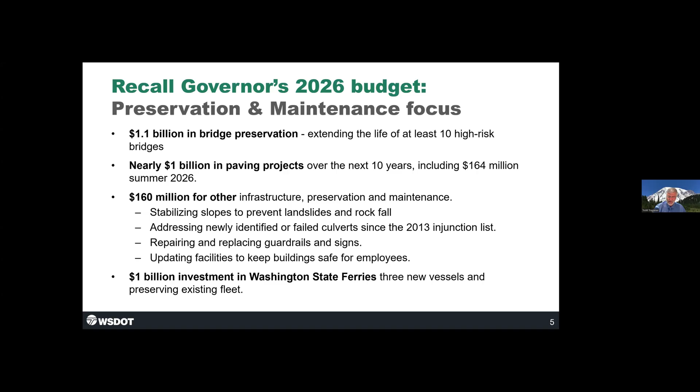As we walk through the '25 season, the governor, in his first full year in office, very much learned and came up to speed quickly on the need for preservation and maintenance, and actually incorporated that into his budget request going into the legislative session, asking for over $3 billion. So we didn't get the 3 billion, we got 1.5. That sets a very good and interesting stage.

Some more specific details—Charles had this laid out in a slightly different format. Here is that 1.5 billion: 1.3 of it lays out in our traditional preservation, and 200 million goes into maintenance operations. More importantly, right now, as we look at the 25-27 session, it's 300 million into preservation and 40 million into maintenance. Hang on to those numbers.

I think everyone has been intently watching the space program with the successful splashdown that happened. As I was thinking about that 1.5 billion, I think Charles articulated that it wasn't nearly enough. Another way to think about that is Apollo 13—if you remember, when they needed the oxygen scrubbed and their mission was a failure, they just wanted to keep the astronauts alive.

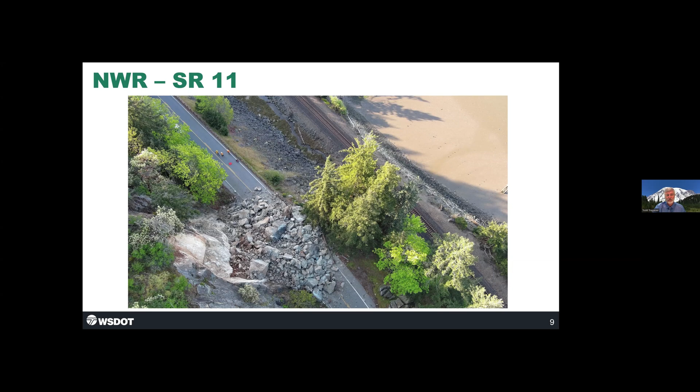Northwest region: an unstable slope and a landslide. This should start to look scarily familiar to you. Northwest region: a steel structure, not painted, member failing, detours for traffic impacts—could have been prevented if it was painted. A theme you all know, but it's worth reiterating.

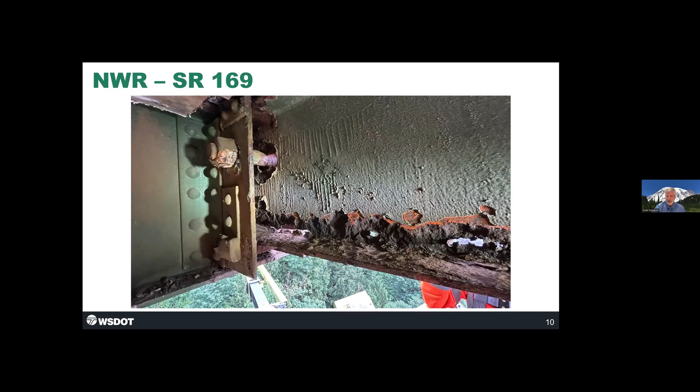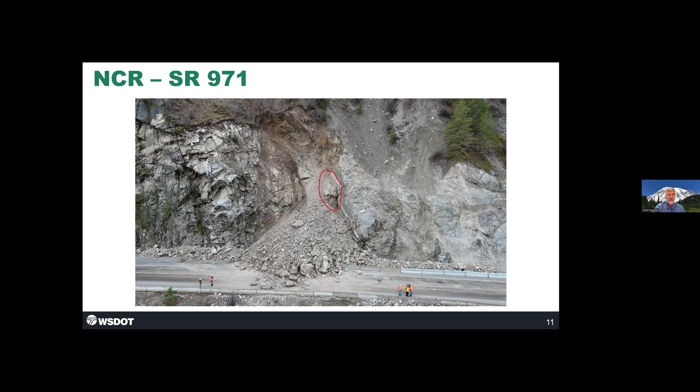North Central region: another unstable slope, failed onto the roadway. Starting to sense a theme here on unstable slopes. North Central region: bridge rail up north—look at that, that didn't deteriorate in a couple years. That's 20 years of deterioration that could not be programmed because the prioritization decisions that needed to be made had to be done with an emergency contract.

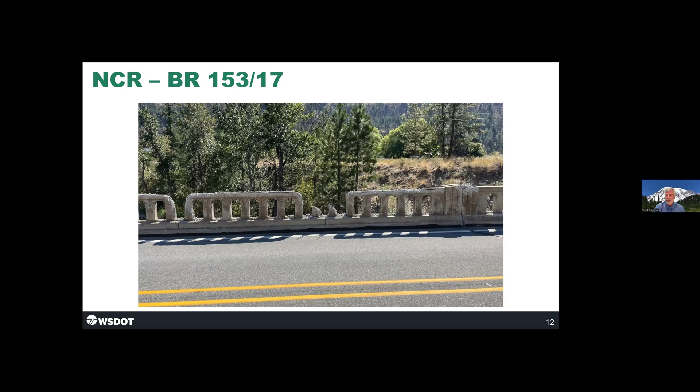All these slides you're seeing are done now with emergency work. Carbon River has become the touchstone piece—it's like now Carbon River isn't just a project, it's an acronym for failed preservation. Is that going to be another Carbon River?

So Carbon River, again, I think you all know it well, but very low volume road, no freight movement. Almost every prioritization method that you can think of would say, if you've got to cut funding, you would cut it here. But that cut of funding, which was done, resulted in this structure ultimately not even being able to carry pedestrian traffic across it.

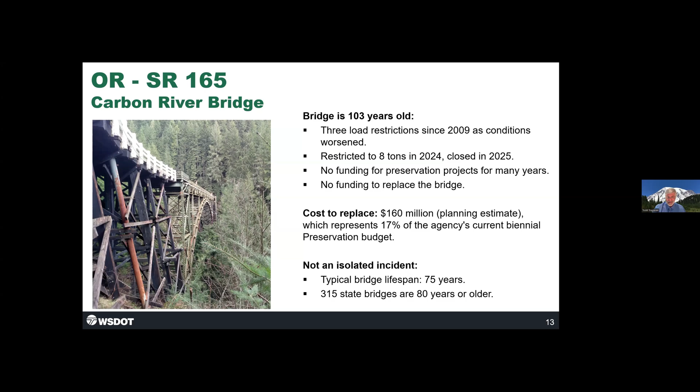Now, if it is chosen to replace it, its napkin estimate is $160 million. So Carbon River really did get everyone's attention on this need for preservation and maintenance. And as bad as it is for SR 165 and Carbon River and the citizens around it, it is good for getting a solid understanding of where we're at.

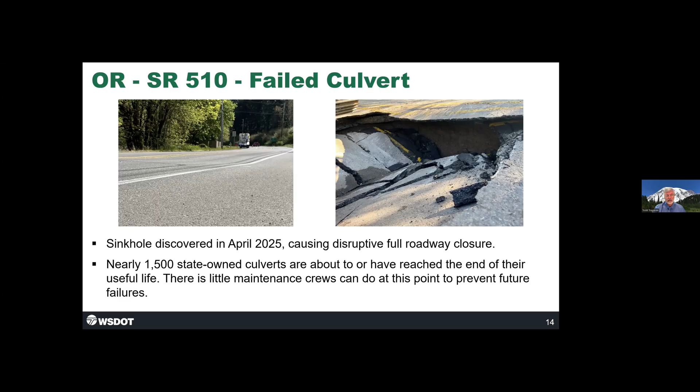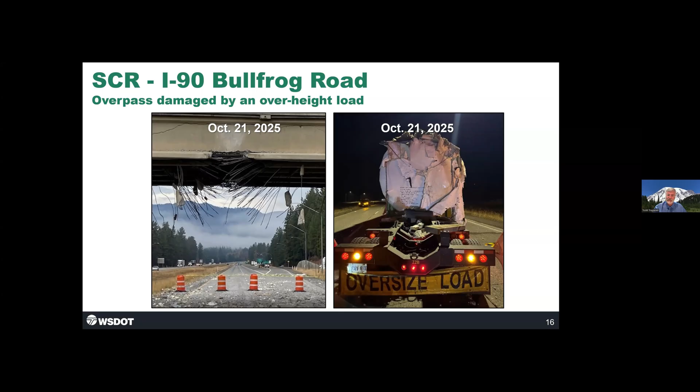And then to hit all 6 regions here, just a utility vehicle out of control hits a bridge rail, and we got another road closed and more emergency work.

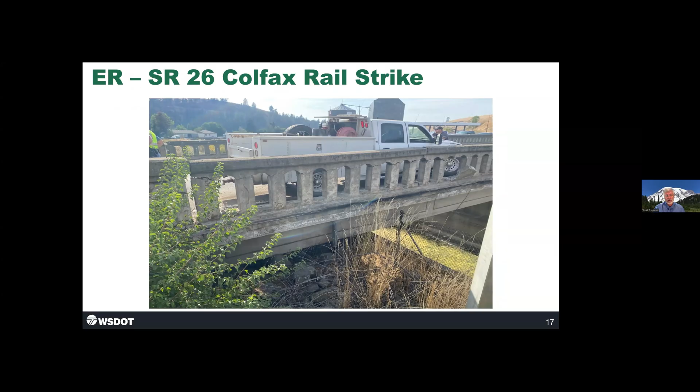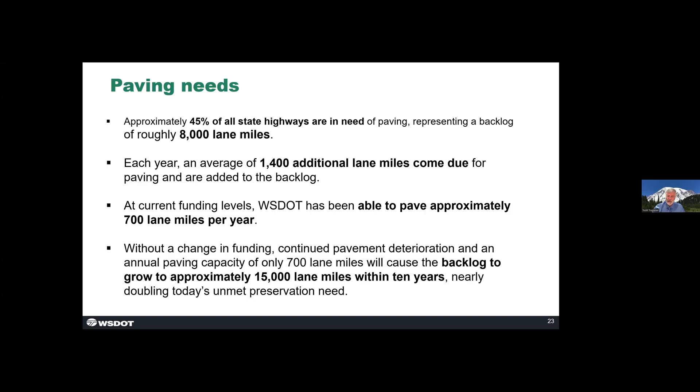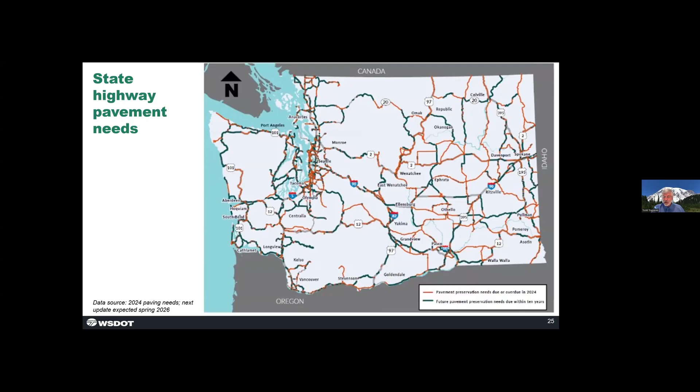Do you want to see it in a graphic picture? Sorry that it's blurry, but just know orange and green are bad. That means it's in those categories. Light gray means you're in good shape. How much light gray do you see on that map?

Not much. Okay, we're going to jump now to bridges. It's the same story, a lot of data on this slide. I know I'm moving fast, so just go where the line has the underline on it.

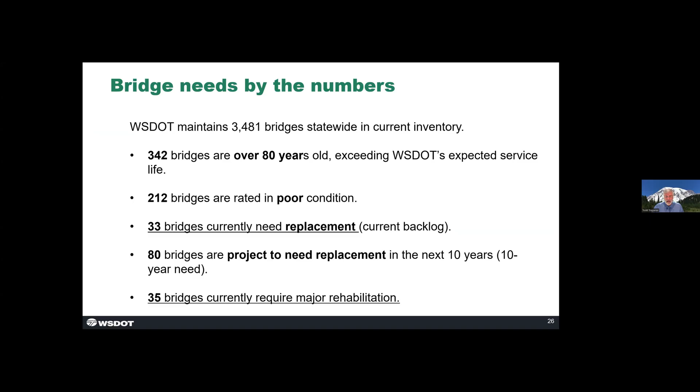33 bridges currently need replacement, 35 requiring major rehabilitation. Why? Here's a chart of the age of our bridges. We have 342 bridges that are over 80 years old. That is beyond where you expect a bridge to function.

Look what those who will follow us in these chairs, because a lot of us have gray hair now, look what they are facing in front of them. The amount of structures that were built that are reaching those ages that are going to need attention. And remember, right now we need 2.5 billion. What is going to happen when those 1,172 structures start to need work? I'm going to touch on that, because some of them actually are failing prematurely.

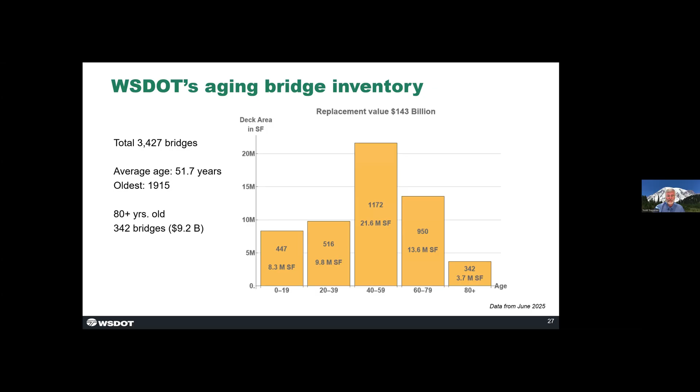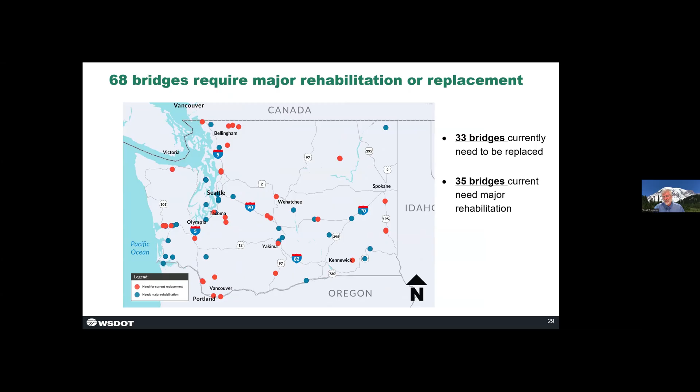If you like graphics, here it shows those 68 bridges. They're not just in one location, they're across the entire state. The bridges that need to be replaced, need to be rehabbed, are across the entire state. If you wanted to go out 10 years, across the entire state, the picture does not get any better.

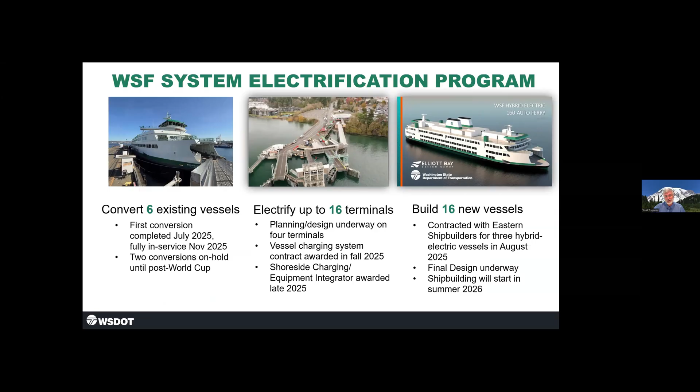Ferries, since it's one of the critical funding needs, is not my area of expertise. Charles touched on it a little bit. I'm just going to hit it lightly on what's been passed through. This is what is believed is needed to try and keep this system going, and I'm just going to break it down simply in what they tell me. Charles again touched on this one.

This is a graph that just shows you the boats are too old. They need to be replaced. They're not being replaced in the right timeline, which means that they're not reliable. They take more money to take care of. And the number of boats that we have is insufficient for the need. That's the number one problem.

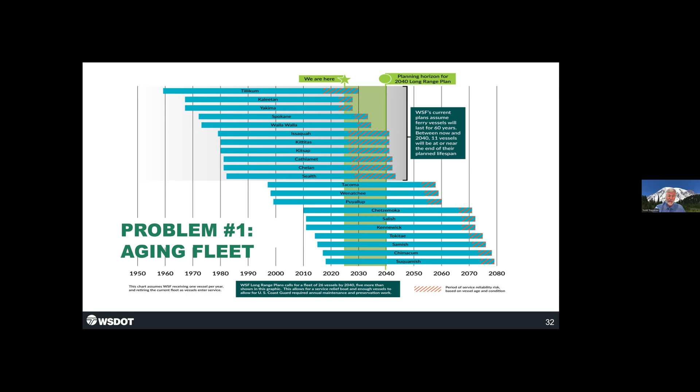The number two problem is this. This is a very difficult chart to read, but basically what it's telling you is we're being expected by the legislature to get out of the greenhouse gas emission creation, and you can't do that with clean diesel. Clean diesel reduces particulates dramatically, but it does not reduce greenhouse gases. The only way you get out of greenhouse gases, all this mess that's shown you there, is electrification of not only your boats, but your terminals.

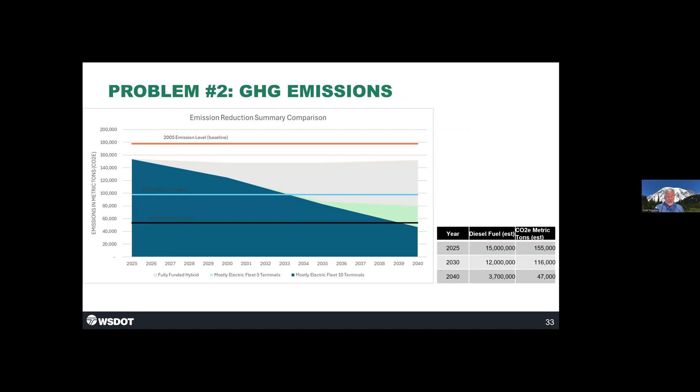Okay, jumping to the next critical funding need, maintenance operations. I've just got a couple points I want to make here. This is just a slide to show you the draw on those funds is getting more and more. I could have a whole presentation on all the aspects, but the chart on the left shows you all these assets we're building with that mountain chart.

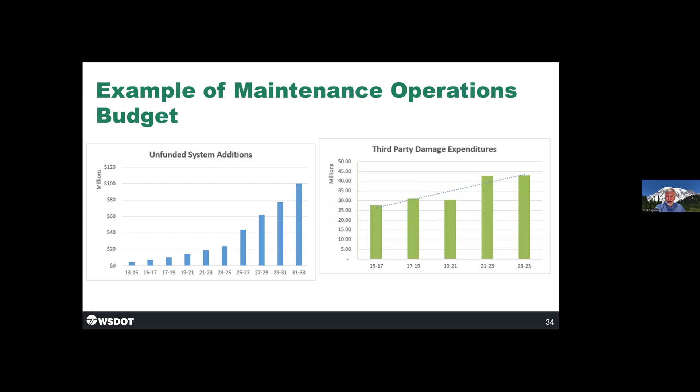They need to be operated and maintained. That money is not being given with the projects—that is the cost of those. The chart on the right just shows you one thing we do, how the cost of it is going up over time. I'm going to slow down just a second because I really want you to think about this.

Part of maintenance operations—I think we all understand maintaining and operating the highway, but we've hit a critical understanding that our facilities, where our people are operating out of, are not where they need to be. The facilities that take care of our equipment, that house our equipment, that allow us to have equipment, the facilities that allow us to have the resources to utilize that equipment, they're all too old.

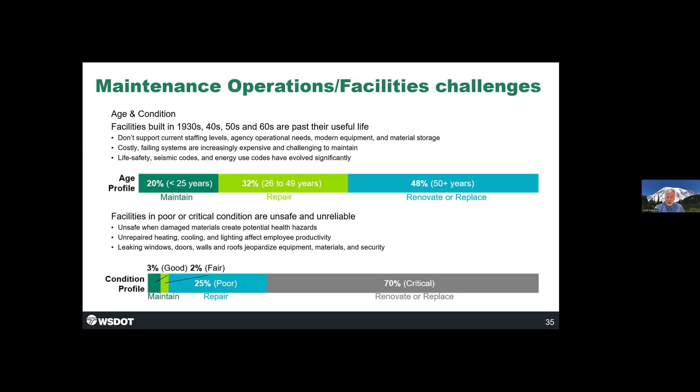Safety is always one of our critical funding needs. There's so many ways we could talk about safety, I was wondering how I was going to present this. I grabbed some verbiage on a proviso. There were some provisos that came out of this legislative session. This one is about getting the legislature to understand more when they invest in preservation, when preservation is done where there's vulnerable road users, can we kill two birds with one stone? That's kind of a current focus on safety. Safety could use investments on all sorts of levels.

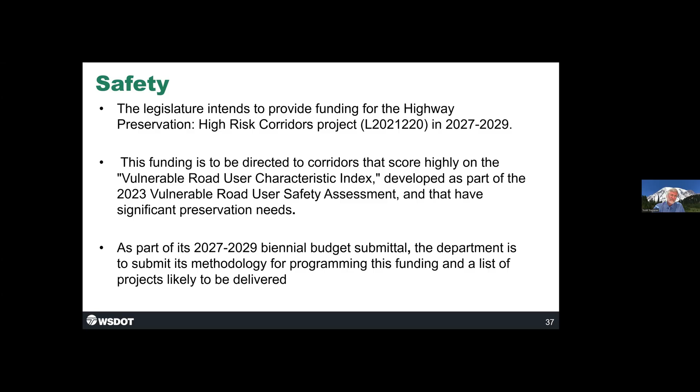Fish passage, the fifth one, we're just going to be continuing to comply with the court ruling. This has resulted in a lot of projects, I'll show you that in a minute. It also results in a large funding gap that still exists.

I think Charles alluded to this too with his level of service. Those were the 5 critical funding needs. This is not the 5 critical funding needs. Within a very short period of time I was able to quickly create this list, and it doesn't fit on the slide on purpose because I wanted to illustrate I could fill a slide in a snap of a finger with projects that you all know, some of them you endorse, some you try and make happen, that all are not currently funded in that $7 billion. That 1.5 billion is not helping them out. Any money that goes to any of these things will stand in the way of the 2.5 billion that is needed for preservation, state of good repair. So this is a challenge, and these projects, as you all know, are usually pursued by somebody.

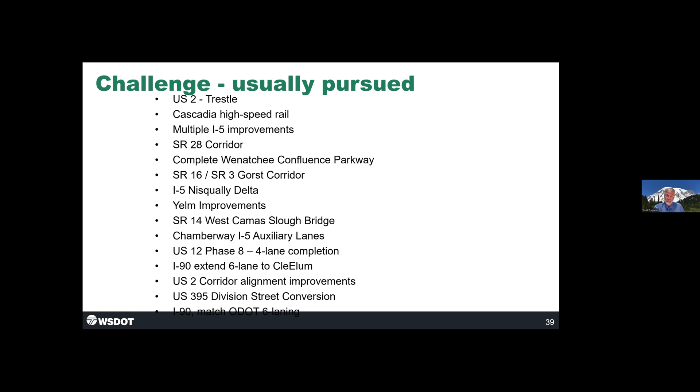Reflecting now on the impressions of the construction year. I just showed you a whole bunch of state resource needs, pavement, bridges, culverts, and all of this. I'm here representing the state, but I feel compelled to remind you, and you all know it because you usually have them here, the cities and the counties can tell you the exact same story with their system. They have the exact same type of problem, correlated to their size compared to ours.

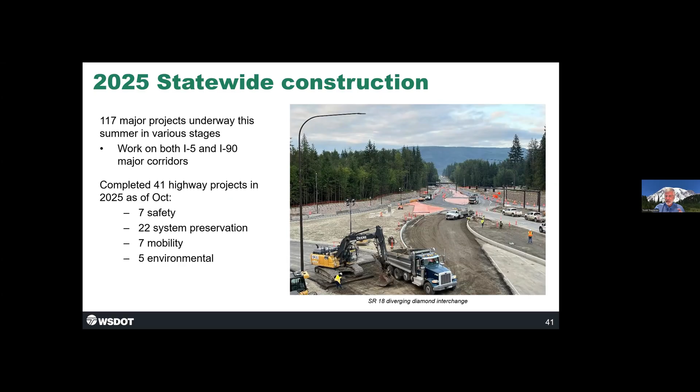Okay, so that was kind of depressing. Going back to the space theme though, we just had a successful splashdown with the integrity capsule. I want you all to understand and appreciate that 2025 was a successful splashdown for DOT. With all of your help, we don't do this alone, we had over 100 successful projects. I'm going to click through these really fast because of time, but they're important to see.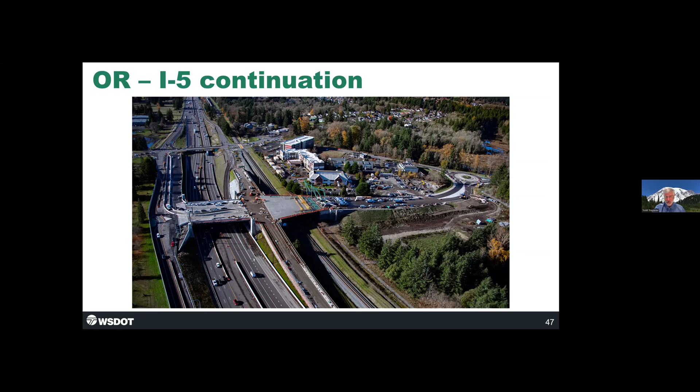Most of you on this call drive this a lot, you drive it probably paying attention so you don't hit the cars around you, and I know you have much appreciation for how much is happening here on the improvement of the I-5 corridor. 2025, another successful splashdown. However you feel about the bridge and fish barrier issues, we are pursuing that program with success after success after success.

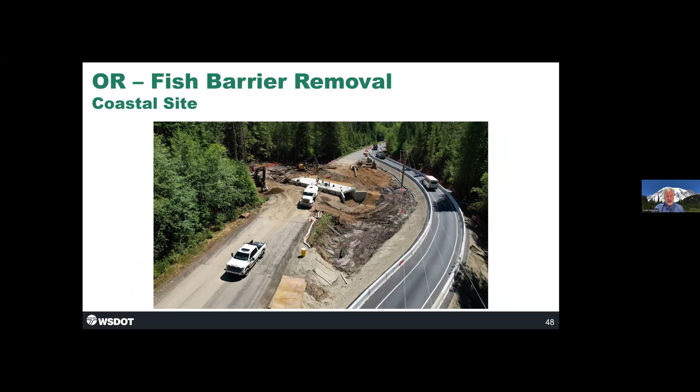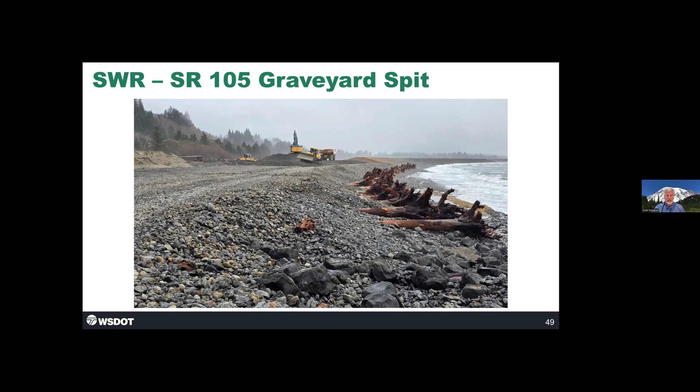This is a grade separation - we've talked about this for a long time, getting started in 2025. Snoqualmie Pass East is one of my pet projects because of my history in it. You are driving on miles of it that are a success, and know that in 2025, there's still more success in pursuing this grade separation being manufactured.

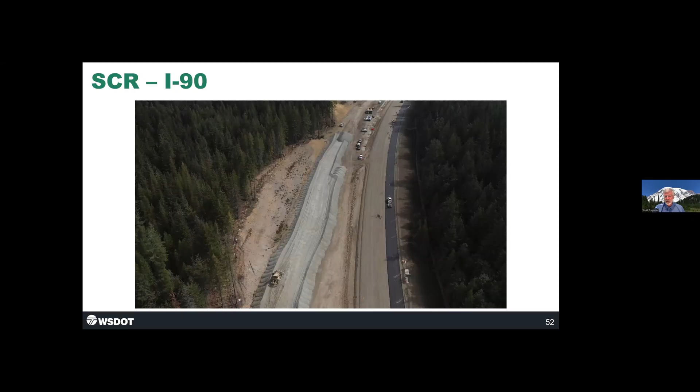This is more about animal separations, a huge success with splashdowns. Another one near to my heart is the North Spokane corridor. This is a picture of the crossing of the river - you can see off in the distance the corridor that's completed. Huge success, with 2 more contracts out in the contracting world right now, pushing this closer to I-90.

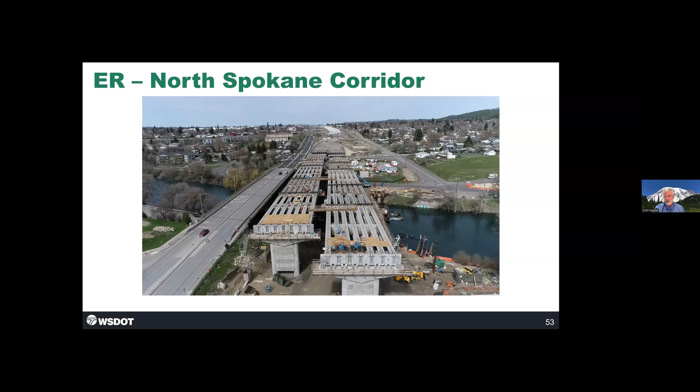2025, huge, huge success. So with all that I presented, there was also what was depressing and what we learned. If you look at 2025, we dealt with a host of emergency work, a program size that's the largest we've ever had, and these December storms.

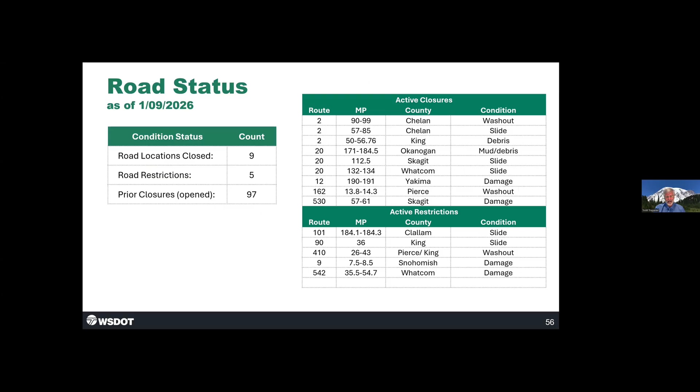I'm moving really fast, but I know you'd love to see some pictures. This atmospheric river that hit us in December, in a few days, caused more damage than I can ever recall in such a short amount of time. Over 100 roadways closed - this is a Northwest region hit hard.

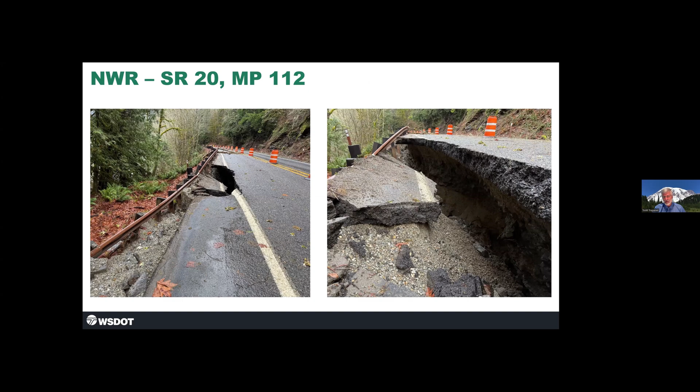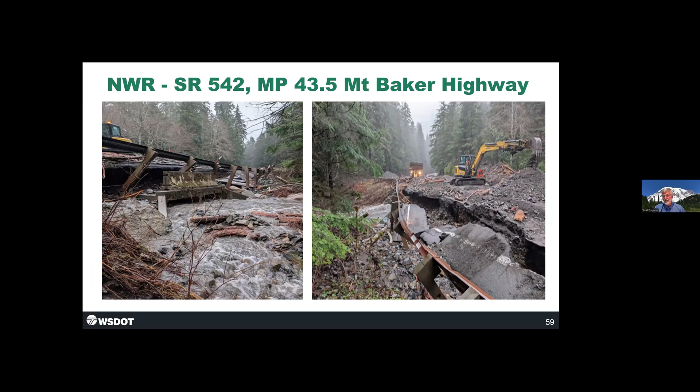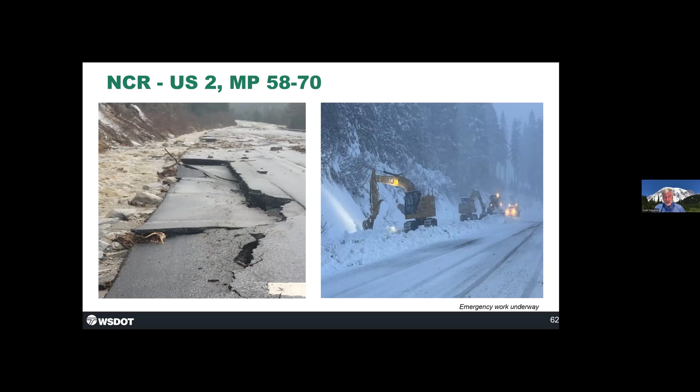This is North Central. I'll stop here for a second and take a breath because this is important. Look at that picture on the left - Tumwater Canyon was all but annihilated. There were like 7 areas close to what you see in that picture, roadway completely gone, all the supporting roadway prism gone, everything gone. And on the right is a picture of like 9 other locations that looked like that.

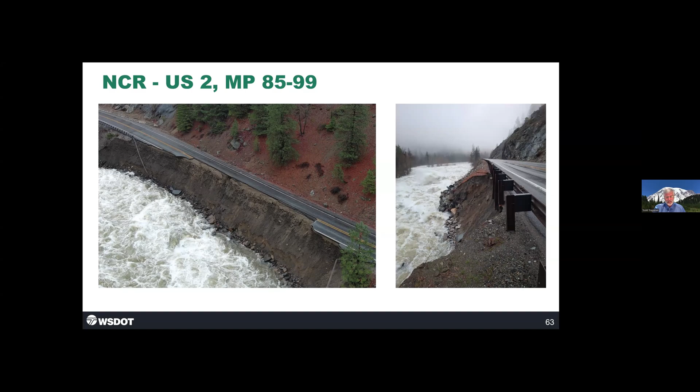Driving down the road, they didn't look bad, but if you looked over the edge, there was nothing holding up the guardrail any longer. So the amount of devastation on US 2 and Tumwater Canyon was all done by emergency contract - done quickly, efficiently, and effectively, but still costly and not planned in the program.

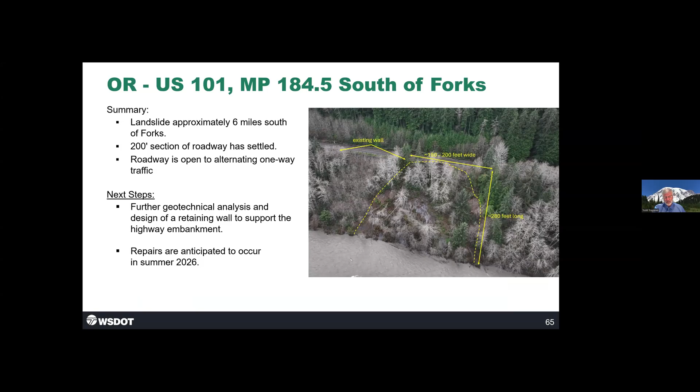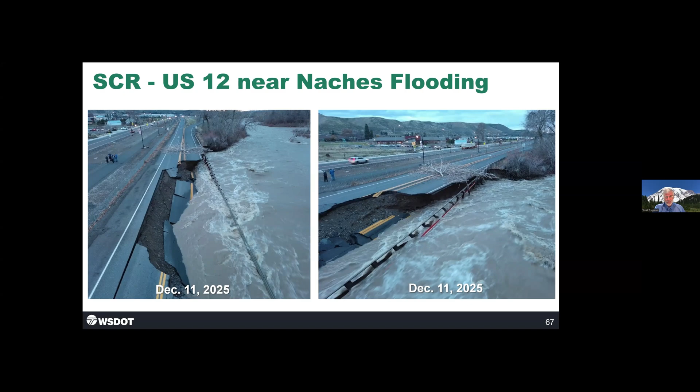South Central region, also in Naches, lost all of US 12 - all emergency work, over 20 emergency contracts, still putting together $50 million worth of work. So for us to pull all that off and keep our astronauts alive was pretty darn good.

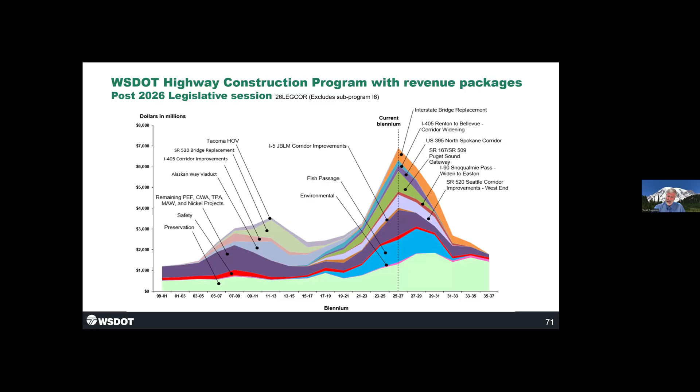So where do we sit now? We're continuing to deliver the largest program by dollar that we have ever undertaken. We've got this mammoth chart in front of us, and I'm here to tell you, just like that splashdown in the Artemis space program was a success, and they're planning for the next one, you're going to see the same success in '26. That's what DOT is here for, with the support of all of you.

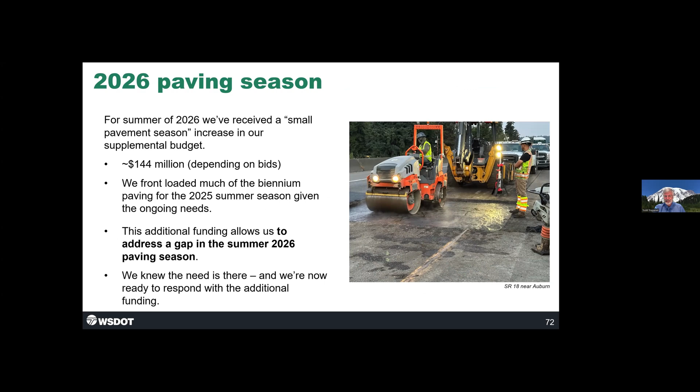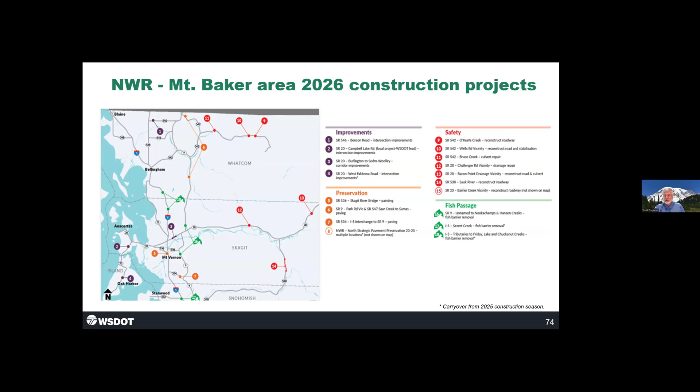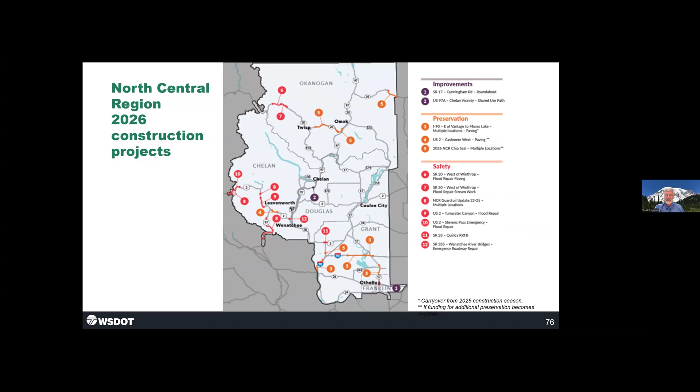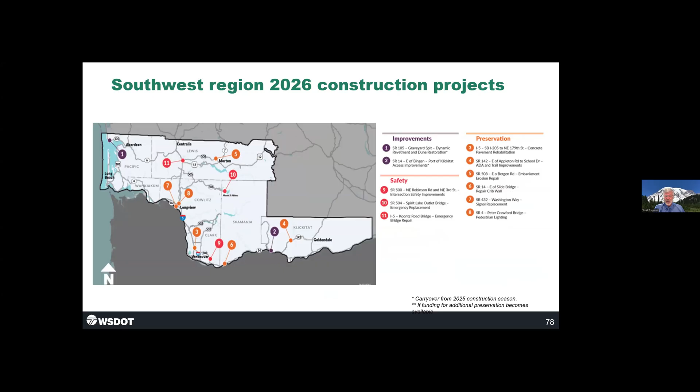South Central region, projects over the entire region. Eastern region, projects over the entire region.

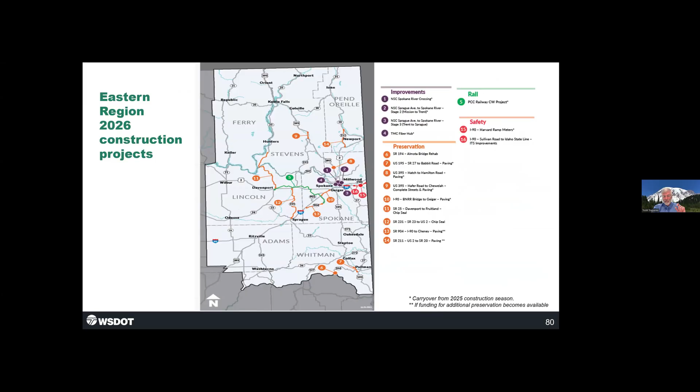The positive side of all of this is, man, are we going? We've got a space program going, and we're going to do another launch. We're going to get that base built. We've got everyone's attention because of what has already happened. They want to hear what's going on.

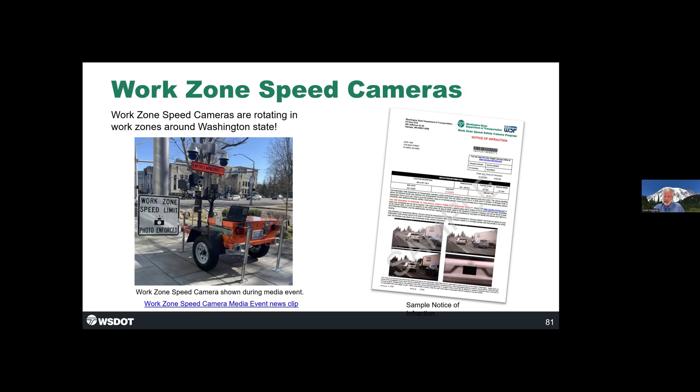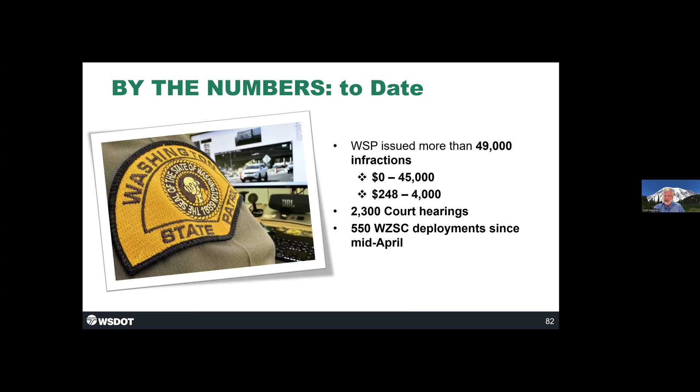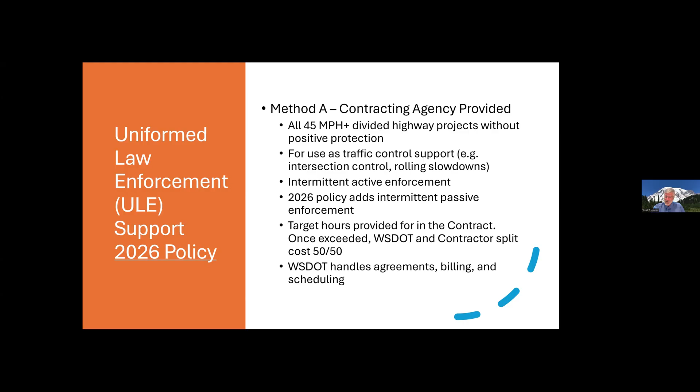Not only are we going to do this 26 season, I think you might have seen this come out, it happens to be like the 1-year anniversary of our work zone speed cameras. We will be having more work zone speed cameras this construction season. They're very successful, giving a lot of infractions, and they're starting to show data that they are dropping speeds. We will be using uniformed law enforcement officers within work zones to try and keep them safe. Safety, as we're doing this work, is highly important to us. Keeping our employees safe, our contracting industry employees safe, and the drivers on the roads safe is a priority, and we will be using these tools as well.

Okay, so we've got this space program. I keep using these funny things to kind of keep you excited to hear what I have to say. But guess what? In 26, we've already had the oxygen tank blow up.

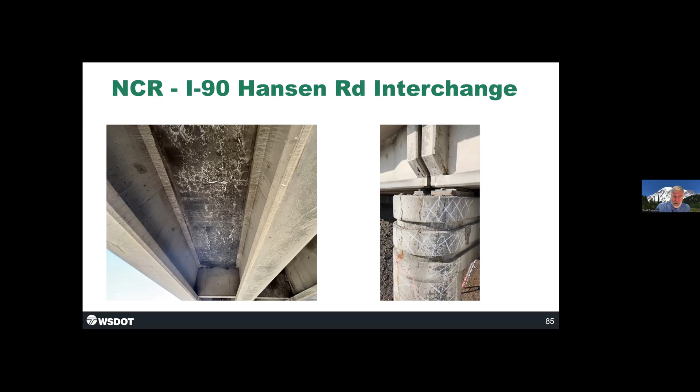I'm going to go back and forth. Do these pictures look familiar? Look similar? So the bridge we're using as a detour 5 miles away, the Hiawatha, is right behind it in its accelerated deterioration. We are watching this bridge closely. It is the detour bridge. The idea is it's probably going to last just long enough for us to replace Hansen, and then this bridge is going to go out of service.

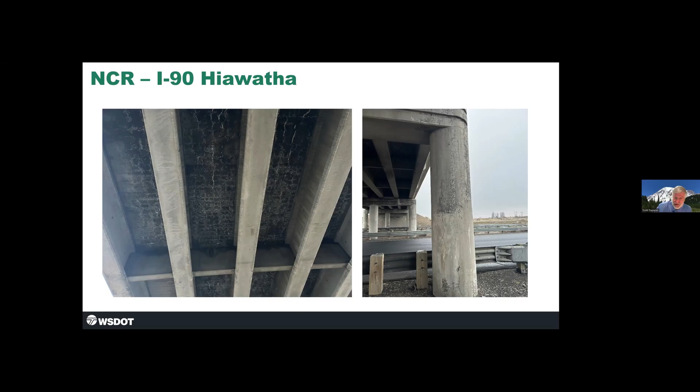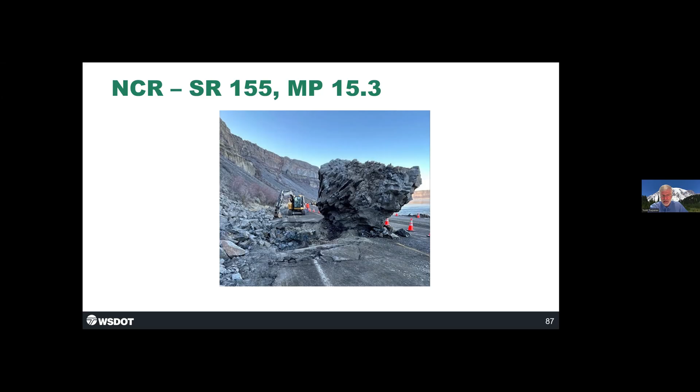If bridges aren't enough, these unstable slopes, I'm telling you, they're everywhere. There is something going on. I don't know if it is a combination of our lack of investment in taking care of unstable slopes over 20 years, aligned with different earth temperatures and climate, but we're having more unstable slope activity than we have ever had. Many of the features we put in place over the last 20 years, netting and so forth, are all used up because it has been catching rocks with no money to replace it, but we can use that 1.5 billion for some of that.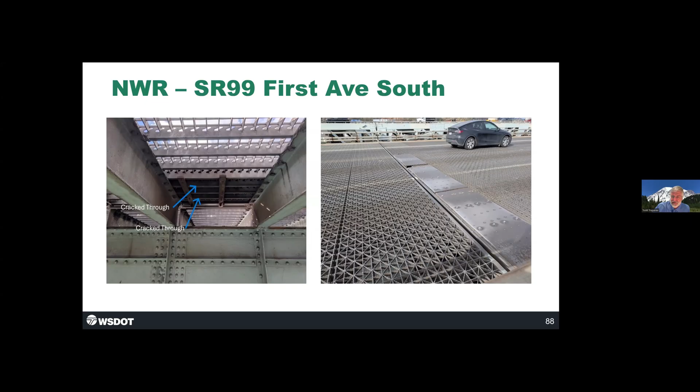This emerged out of nowhere. We count on this bridge to move traffic because of that deck replacement that we're doing, the Ship Canal Bridge. This is a grated deck. It started to fail, so a series of emergency contracts to try and keep this thing open that was not anticipated.

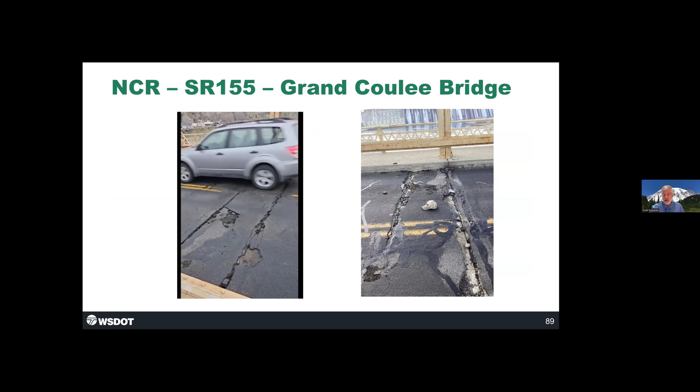This is a bridge up in Chris's region, North Central region, by Grand Coulee Dam. This is actually a video, it's on Facebook, you can go look at it. When a vehicle drives over this, it bounces up and down to the point that you should be concerned. It is safe to be open, but it does tell you this structure is in need of some work.

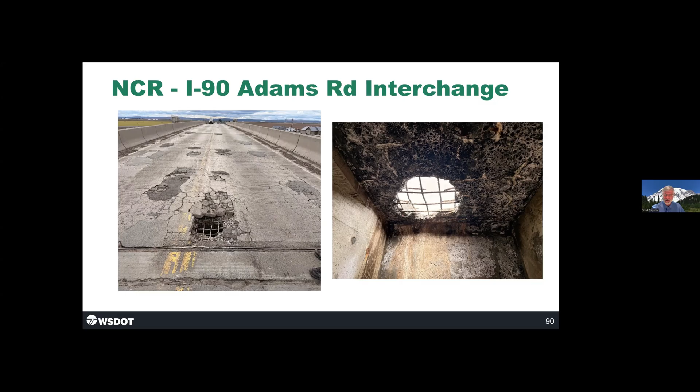Okay, I talked about Moses Lake area, the Hanson Bridge, the Hiawatha Bridge. You move a few more miles to the east, and we've closed Adams. So now we've got 3 bridges that are accelerated, 2 of them not usable and closed, 1 on its way, well before their lifespan, because they were not preserved correctly. Not because anything was done wrong, it's that when you make priority decisions but don't have enough money, there's something you don't get to do, and there's a consequence to it.

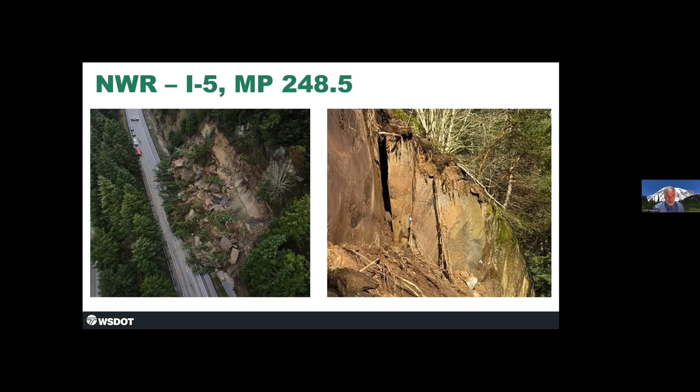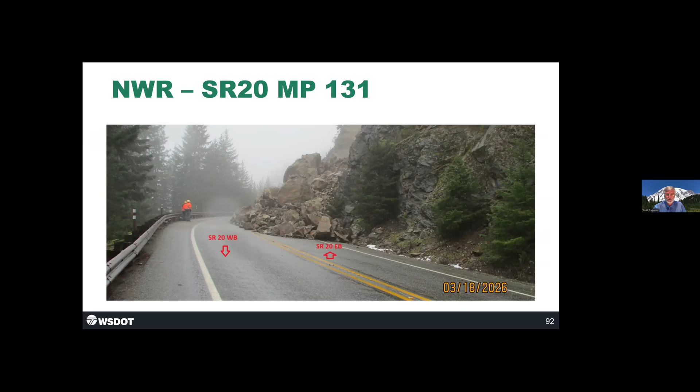Here's another washout. Doesn't look bad because the photograph doesn't do it justice. This needs attention on SR20. Out of the blue, another slope comes down.

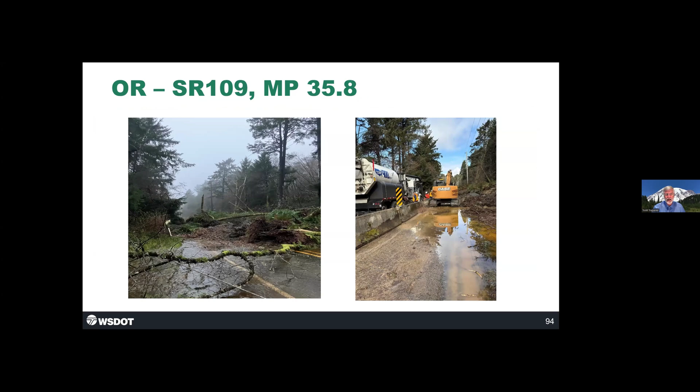This is in the Olympic region on 109. Culvert, another culvert failure. This is a combination of a resource being too old and, again, extreme weather events.

Another emergency contract. And emergency contracts, our issues are coming so fast, I can't even keep my presentation updated. So there's a few more that aren't even in here.

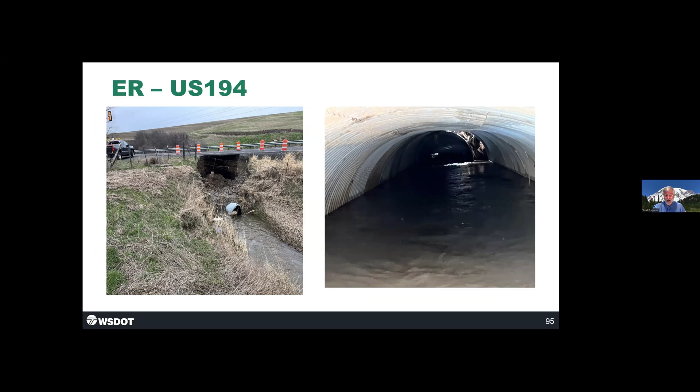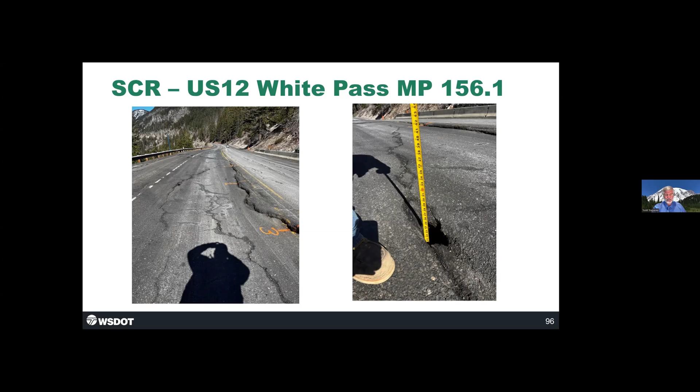The lip was getting so bad, it was catching cars. They go out there, they can drop a shovel handle in this hole, and another unstable issue that is taking place. We had to close a lane, evaluate it. This needs attention. So what is next on all of this?

We need to try and stay focused on these 5 critical funding needs: preservation, maintenance operations, ferries, safety, and fish passage.

We can do it. We are going to have guiding principles, and I know you're all with us in this. We're going to be accountable, delivery. I just already showed you, we have a construction program planned in 26 that builds off of the success of 25.

I'm paralleling it to the space missions. We had a successful splashdown, even with all the interruptions of emergency work. We did more things in 25 and kept the system going at an amazing level.

We've got 1.5 billion more that's been added in, which does not return our mission, but it's helping keep us alive in the meantime. We're going to utilize that money as well, and you're going to see all that work delivered.

You'll see that, and while doing this, we will be innovative because we've got to be thinking out of the box, collaborative. That's why I'm here, and we need to sustain all this by having a workforce, the salaries, the training, sustainability. I'm going to say it again, we've got to have our facilities.